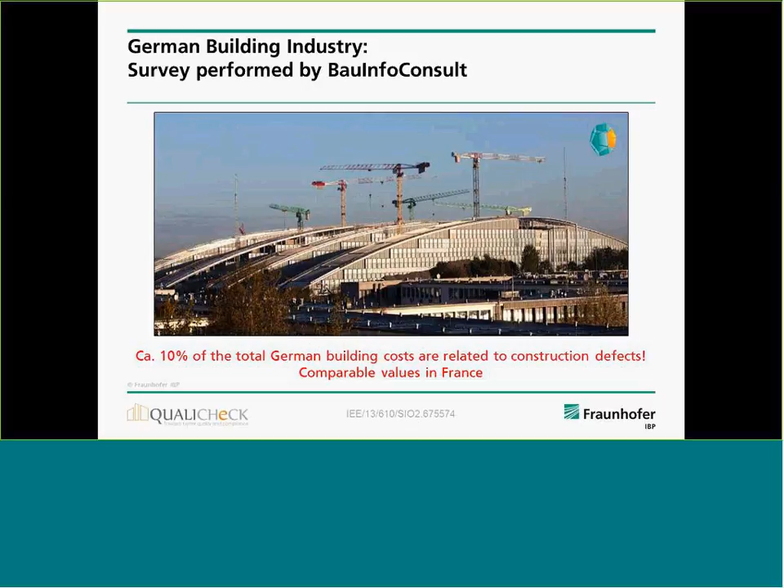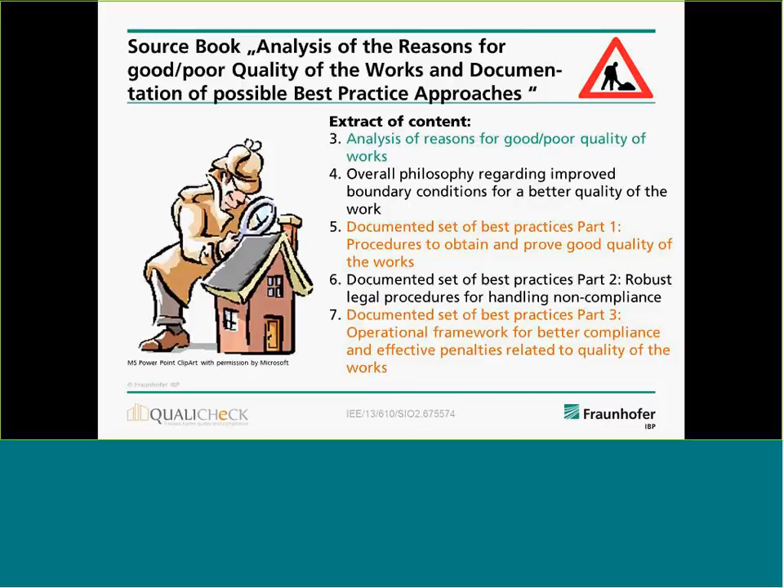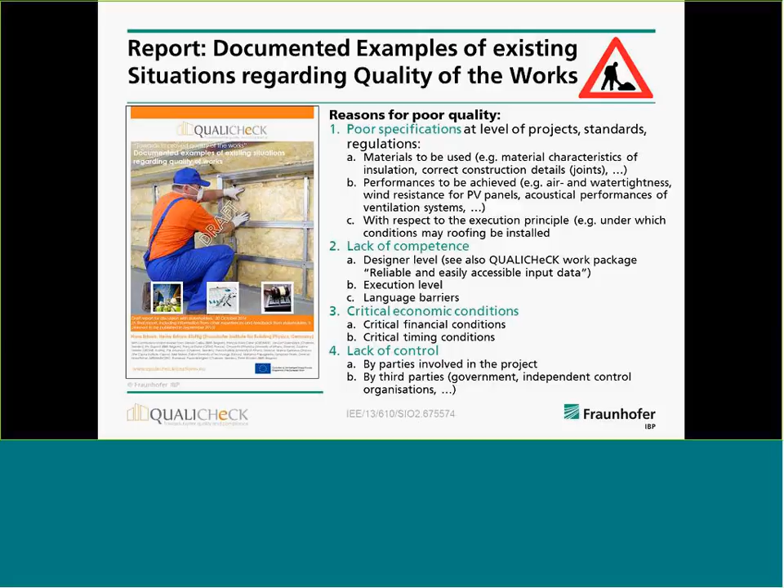Just to the first part, the analysis, the reasons why quality often is not realized in the expected way. We found four main topics. One is the specification area; Peter Wouters already mentioned it at the beginning. Then we have the problem that some of the workers are not as competent as they should be, and then we have critical economic conditions and lack of control. There are a lot of different things we figured out, but last not least, those are the main areas we have to look at to make the quality better.

What I will do here in this webinar is just to give you a short idea of the outcomes. Therefore I present some of the results we have, or some of the case studies we found in the member states. Besides the source book, we documented these procedures in so-called fact sheets. You will hear later on all the fact sheets, so you have a detailed description on the fact sheet, and then you can find the condensed description in the source book.

The first important activity we found and documented is that if you try to make quality better, you have to concentrate on a clear description and work specification. Otherwise, you never can check if what you expect really is realized. We have found different examples. One of the most comprehensive ones is from Sweden, the so-called AMA, General Material and Workmanship Specification System. Here, for I think more than 30 years, they collect descriptions, and this can be used by everyone who is writing a tender or something else, to specify what has to be done and how you should check the work during the process.

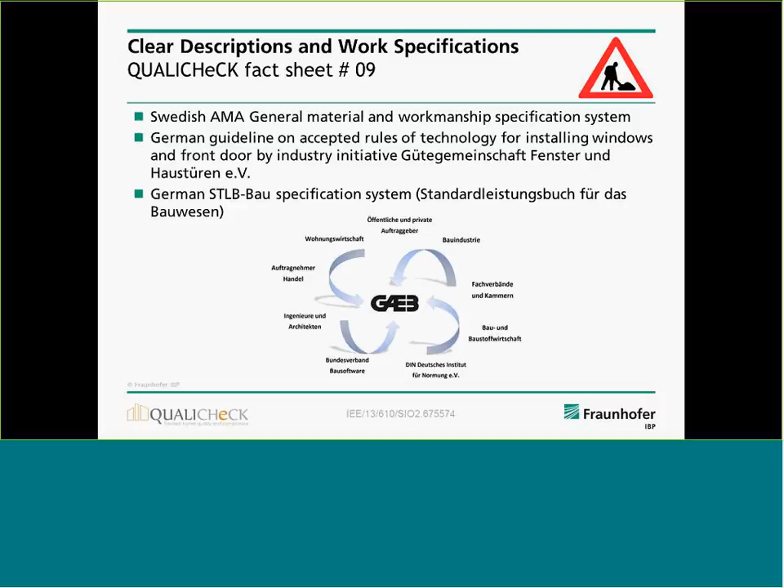Another interesting example is a voluntary scheme from Austria about training for installers of heat pumps, solar thermal systems, PV and ventilation systems. They organized at the AIT, the Austrian Institute of Technology, a course system and certification system, and offered this to the installers in Austria.

And it is voluntary, but if you use the certification scheme, there are different certification schemes, you have to use this procedure, you have to show that you followed this procedure. So the main thing is that they have developed a course of 5 to 8 days, and then they have a 1-day examination, and after that the installer gets a certificate, and this certificate can be used for 3 years, and after 3 years you have to proceed with this procedure again. And this is really a good thing.

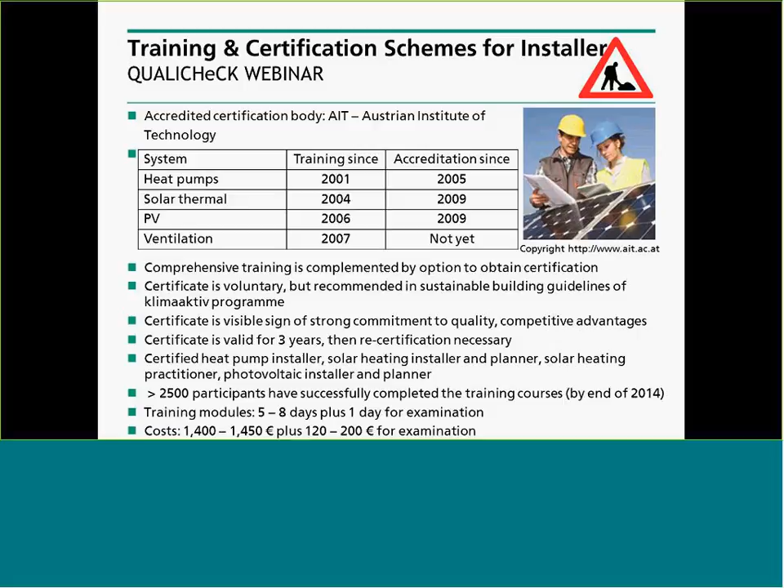And currently in Germany we have a big issue on the real performance of heat pumps in the field. And the outcome was that a lot of information is needed for installers, which is not currently available on each site. So therefore it's a really good example, and I think it's useful for other countries as well.

Fact sheet number 47 is about insulation of cavity walls. Here in the UK, after a study of potentials, they found out that they have to pay special attention to the cavity walls, but they found out that a lot of people are not aware of this procedure, and therefore they established a fund. This fund guarantees the building owners who apply this technology that the system works out as it was planned, and if there are problems, the fund guarantees the owner that it gets repaired, and at the end you have the system in use as you expected.

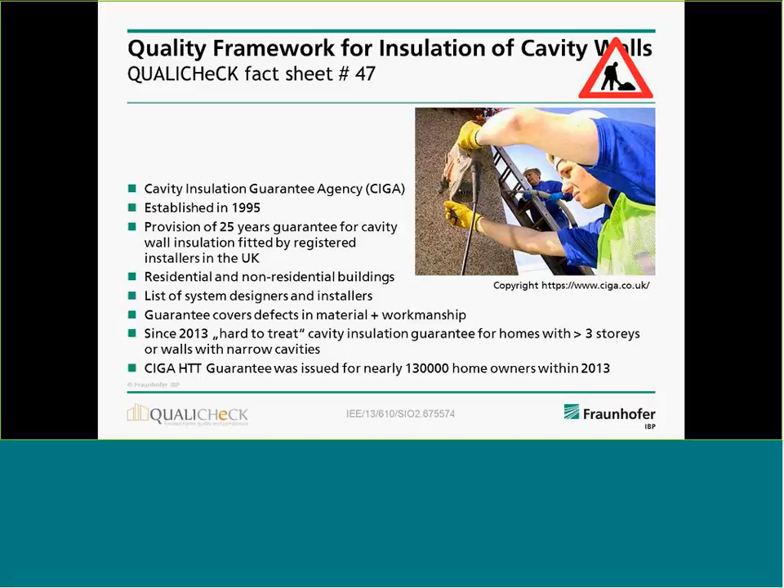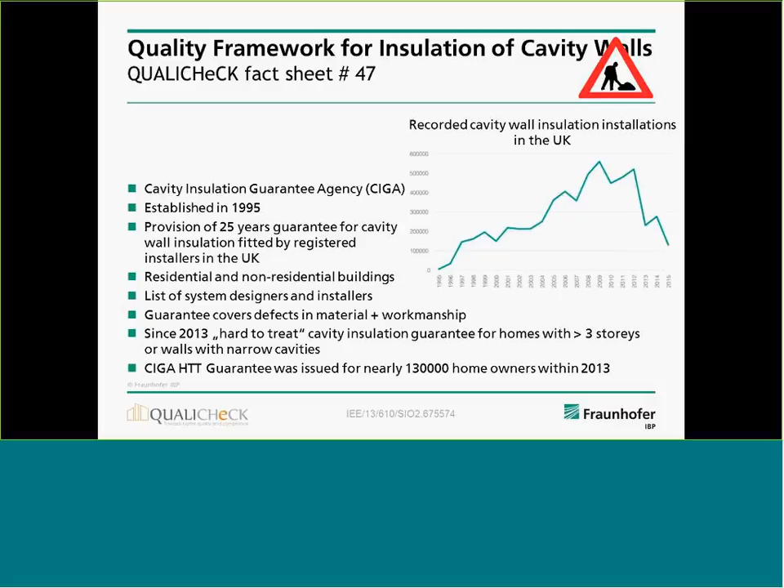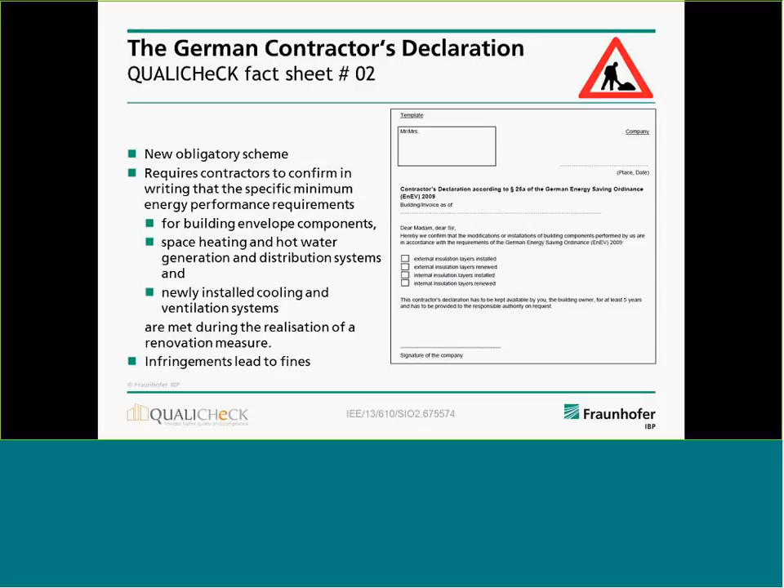Another procedure we tried in Germany is the so-called German contractors declaration. That means at the end of the work, the contractor has to declare that all the installation he has done is in accordance with the requirements of the German energy saving ordinance, and he especially has to mark what he has done, then he has to sign, and he has to hand it over to the client at the end of the process. And that helps make the installer pay more attention to doing the work properly, if at the end he has to sign this document and hand it over.

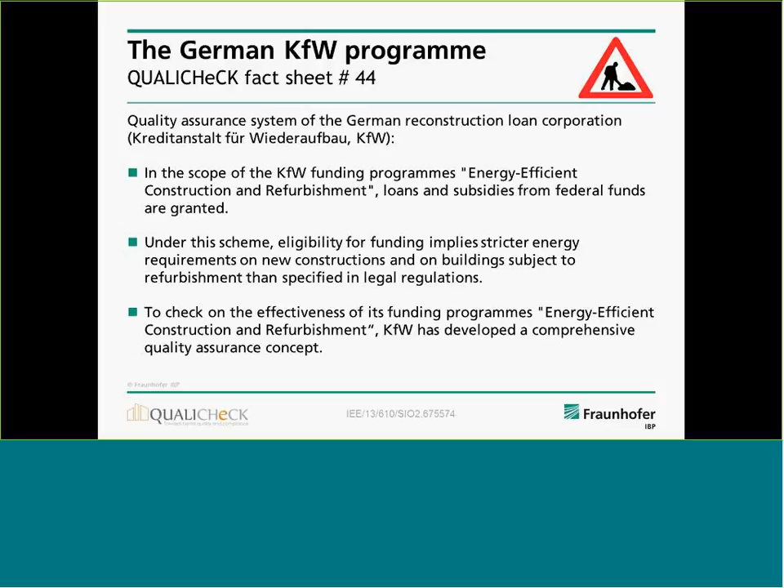Another procedure we've documented there is a quality assurance system from the German financing bank, Kreditanstalt für Wiederaufbau. They established a procedure to check the quality during the whole process of the renovation or new building construction. So they have a clear scheme, with some points of attention: when you have your application, there is a randomly selected energy calculation, and they check if everything is in line, and then you have a second step after completion with a calculation and verification process, and you have an on-site inspection.

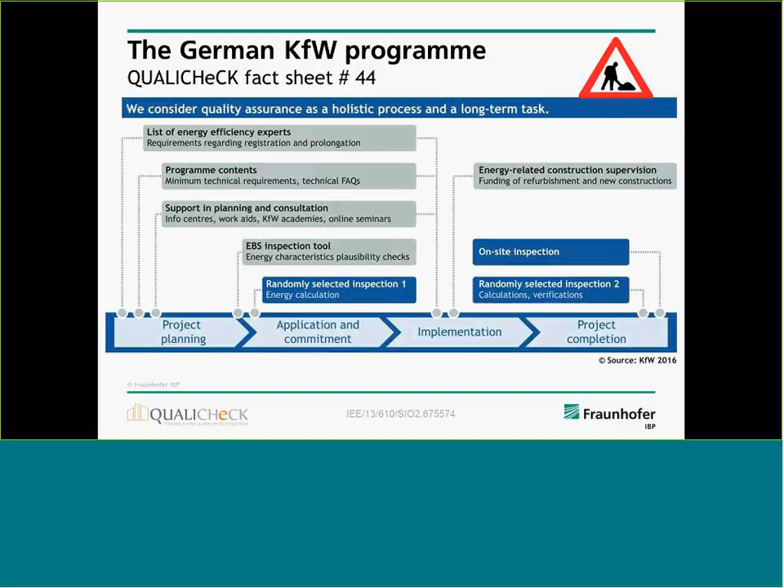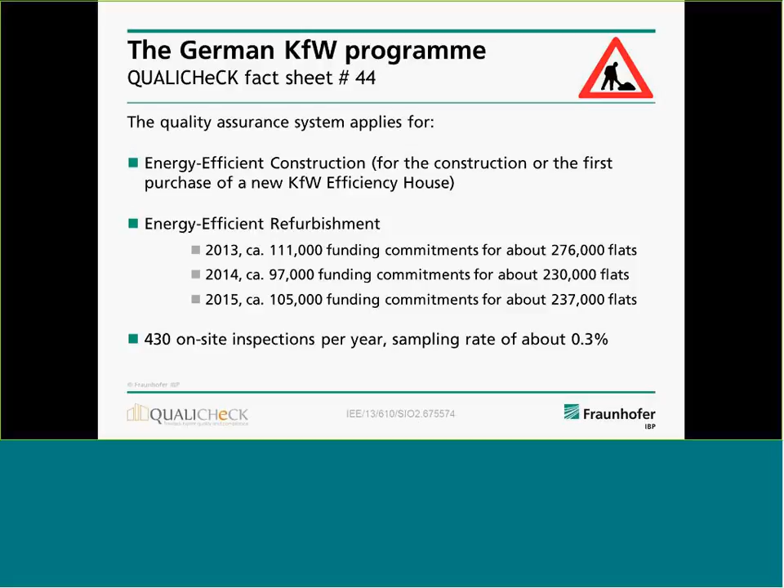So this process works very well too, and we have nearly 100,000 funded commitments with around 300,000 flats per year proceeding in this process, with a high quality check during the whole process. And they then have the on-site inspection with currently a sampling rate of 0.3%.

So that was a short overview of some examples, and as I told before, we documented all of them, as well as the documented examples on the critical situation, in two reports, and all this can be found on the website.